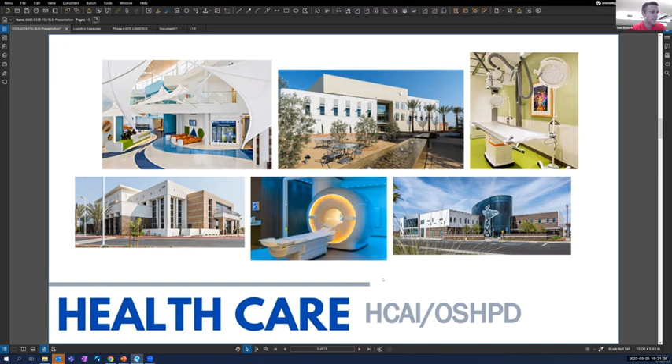That's really where a lot of our time is spent. I'd say the competing sector right now for us is senior living and multifamily/affordable housing. Senior living is where we've seen a lot of work in the past, and multifamily affordable housing is where we're seeing a lot of work right now. A recent graduate who just signed on - it seems like he's been here forever now - but Jaime just went from the Valley Children's Project and is now working on a pretty large multifamily affordable housing project.

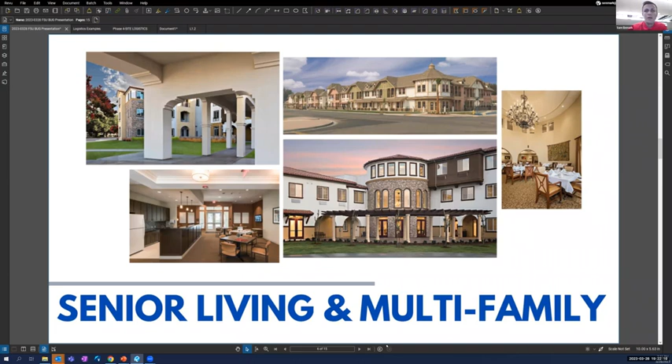Hey, Sam. I'm curious about the senior living type projects, because in Fresno there's not a lot of those. What's the outlook for expanding into that area more?

It's funny that you say there's not a lot of them, because Carrie, Garrett, you can maybe see more into it, but I feel like we get them all the time. Yeah, that's a lot of my backlog and my history of work is actually multifamily and senior living. I've done many of those. It was a pretty large growing market, quite a bit, within the last 10 years I'd say.

I just see that I know a lot of older people right now can't find housing in Fresno - they're called baby boomers, by the way. Yeah, they're all baby boomers. My parents, and you guys that are younger too, you're going to start seeing your parents looking for stuff like that. But maybe you guys are the only ones doing it, because I've actually helped my grandparents move into some facilities that I've built in the past. What I'm thinking is not so much assisted living, but like Del Webb's type stuff, where you can live in a 55 and older community. Oh yeah, yeah. So you guys have a lot coming up then?

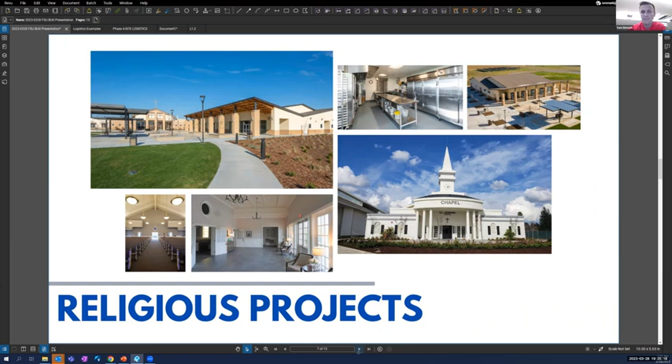And then specialty projects - I don't think we're ever going to dismiss something outright. So when someone comes to us with an RV park in Mid Pines and wants us to seriously look at it, we will.

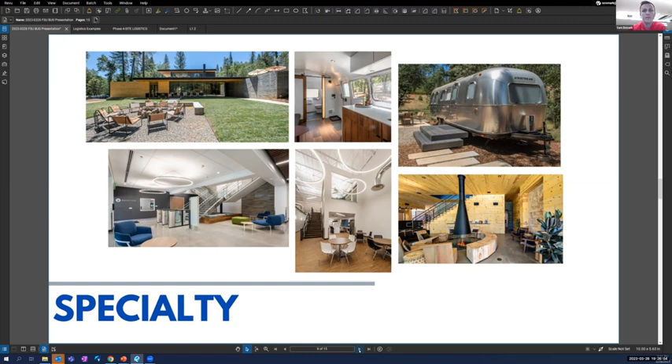So that is kind of a little bit about who we are and what we do. Anybody got any questions on that?

Okay, then we'll roll into careers at Quiring. So I would say, well, first off...

Internships - we're always hiring interns, looking for people to intern. I'm not sure on our exact availability right now, but if there's a spot, we're looking to fill it with interns over the summer. I know Jaime worked during the year as well for some of that time, so we're just kind of looking for opportunities for that.

As far as career paths go at Quiring, if you're going to go out into the field and be in a job trailer, you're likely going to go one of two routes: either a project engineer or a field engineer. The project engineer route will be more working underneath the project manager, handling some of the submittals, paperwork, the project financials - that's more of a focused role there.

And then field engineer, you're going to find yourself under the wing of an assistant superintendent or superintendent, and you're going to be more boots on the ground in the field, working on schedule, things like that.

With that, we'll keep going. We talked a little bit about what a site logistics plan is, but what should it cover? I'm going to roll through these fairly quickly, and we can talk about some of them in more depth later.

A traffic control plan covers how your crews are going to access the site. Pedestrian safety, if you're up against somewhere people will be walking past. Laydown, where all the material you're bringing in to complete the building will be put. Site security, often a fence, but sometimes site lighting, security guards, cameras, and similar things. You want to show where all of those are going to be.

Construction offices, for the general contractor and any trade partners with offices, where are those going? Cranes are critical, and should be part of every logistics plan — if you're going to have a crane on site, where is it sitting? Along with that, personnel lifts, if the building requires one.

SWPPP, depending on the job, is sometimes clearly called out in another drawing and isn't needed here, and sometimes you want to put it on the logistics plan just to make sure it's picked up. Emergency response plan, showing where people are going to evacuate to in case of an emergency.

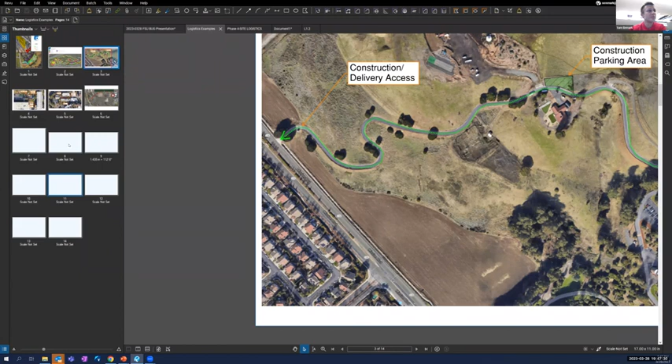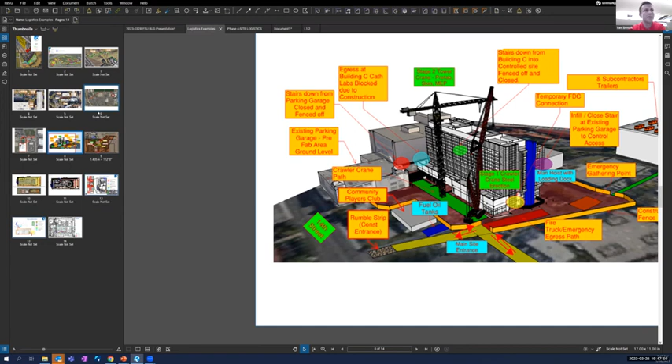Yeah, I'm going to just skip a step here and go to a couple of the logistics examples that I was planning on bringing up, because one of them does show - there we go. So anyway, logistics can be as in-depth as not in-depth. We're always trying to make them look pretty and presentable, but what I'd say is more important is making sure that you get the information you need onto a sheet of paper so that everybody can look at it.

So anyway, I say that only because what I'm going to show here, there's going to be different levels of logistics plans. So here is a hospital that was completed down in Southern California. This was not a Quiring project - I'll admit I'm pulling from a little bit of a past life here on some other jobs I've worked on and logistics plans. But it's a 7-story hospital, and there's a requirement - I haven't dealt with it in so long, I don't remember the exact requirement, but I think it's over 60 feet. Yeah, I'm getting some nods.

Over 60 feet, you need a personnel lift, or a man lift, in order to get your crews to the different floors during construction. Unfortunately, more often than not, the elevators are the last thing that goes into a building, or one of the last things. So having that ability to take not only your personnel, but also material up and down floors, is super important.

As far as location of it, I'm not sure if there's any OSHA requirements for location, but typically you're going to want to put that somewhere that's not going to be impactful to your construction schedule, so you're not going to have to do a lot of work right at the end of the job in order to close this area up. Basically you can see this blue line here - you're going to have that area open and incomplete until you get your elevators running, which again is towards the end of the job. And then at the very end, you're going to have to slap that thing together, close it all up, and get your man lift out of there.

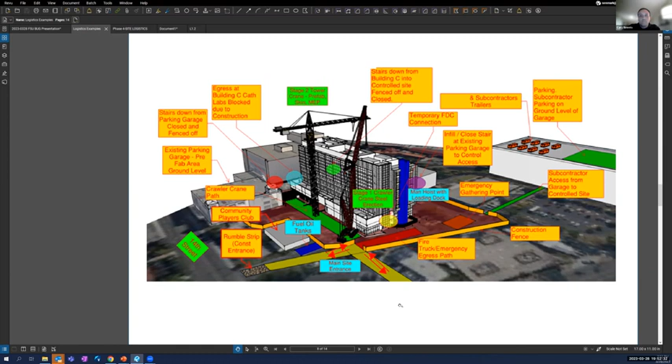I'm just curious, Carrie, Sam, on your jobs that are currently going now with all the weather problems you've had, have you had to do anything significantly different than you normally do? What's been going on with all the weather out there? Sarah, you want it? Well yeah, I was gonna say, since I'm still in a mud phase.

So we started out with, let's call it, one line of rumble strips, and we had large rock—in Bakersfield they like the rock to try and clean the tires before you drive out. Since then, we've changed to doing more rumble strips further into the project site, so more dirt falls off the tires.

We started out with silt fencing around the border of the project, and we've since switched to straw wattles because the wind rips the silt fence apart in this area. We also have a street sweeper that comes quite often, so we try to keep all of our job site vehicles on the street.

We're lucky in the sense that our job site is located out in the field, in the middle of nowhere right now, but we have a lot of street parking. So we have our trades offload all their stuff out on the street and not bring any vehicles on site. That minimizes all of our track out. So it really depends on your areas.

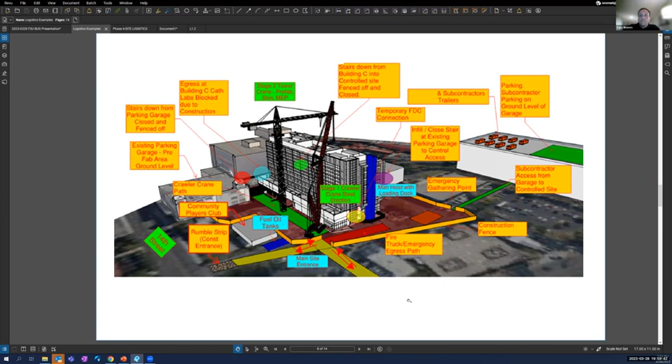Sorry to sidetrack you there, Sam. No, we'll get you back on track now. We live this every year, right? Like I tell my owners every meeting every week, during the winter, construction guys become meteorologists, and we're just so in tune with weather that it's all we have to talk about half the time. No, it's true. We've got one guy in our trailer, Ron, that's his job, he's the weatherman. Ron the wrench? Yeah, absolutely he is. I don't even look at my phone anymore, I just ask Ron.

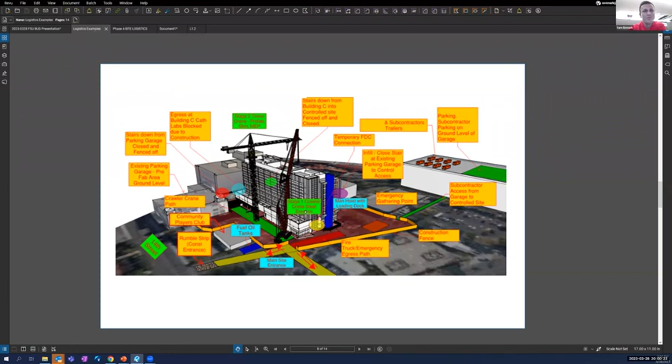Okay, so anyway, I just want to go through and show a couple of examples of logistics plans before we really dive into creating one and going through the Valley Children's example. So obviously this is a very high level, large project logistics plan. It's not going to call out everything you're doing within the building, but it does a good job of capturing the main things on the site, for instance, where the tower crane is going to be.

In this case, the steel was large enough that it required a crawler crane as well as a tower crane, so kind of the path of travel for the crawler crane, where contractors are parking, where our trailers are going to be, up on a parking garage across the way. It's little things like that it's important for the trade partners to know, and important for ownership to know, that hey, we're going to be taking up the whole 5th floor of your parking garage, are you okay with that? If the answer is yes, then okay. If the answer is no, then we got to find another solution.

So it's a good tool to kind of convey some big picture items. And again, this is a plan for, I think this was like a $350 million job, so big project, but they can swing the gamut to any level of project.

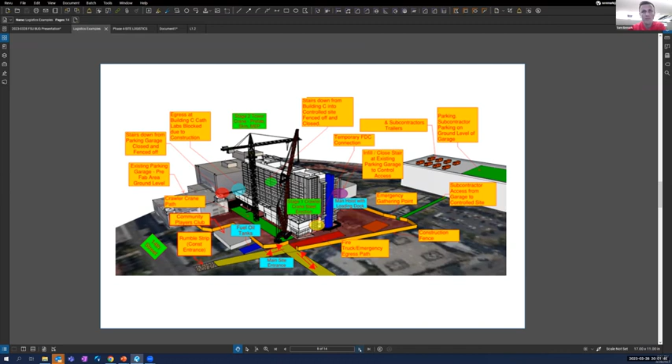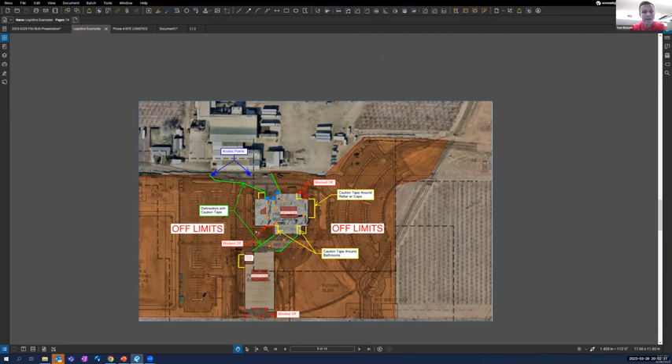So this one is a little bit different. It's not as important where restrooms are at, but logistically you want to show where people are going to be coming in, how this is delineated with caution tape, how they're going to be routed to the building, and then some other miscellaneous caution taped areas or items, and where they're storing the material during the cutting. So just a cool example of how you can have a big master plan and then something as small as that.

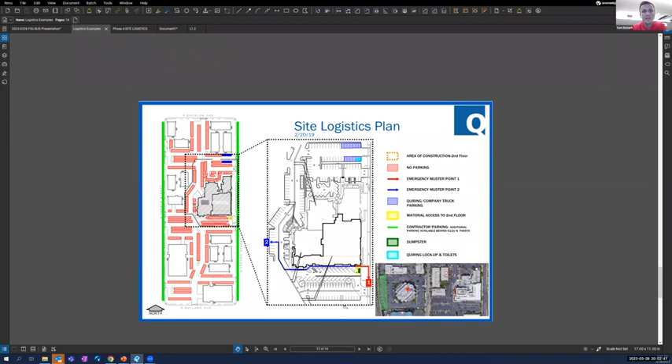I'm going to skip through a couple of these. There's a bunch of different examples, but this is getting a little bit closer to that healthcare one. So this is at a hospital here in Fresno.

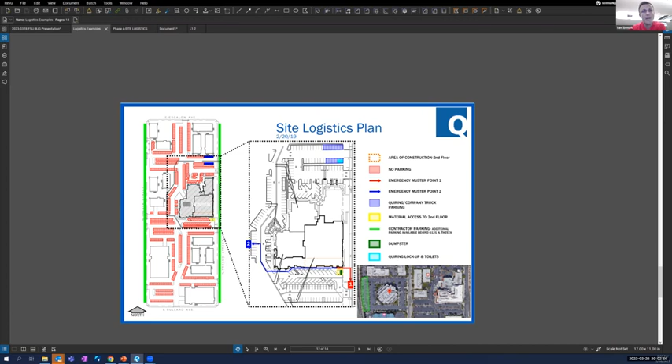So again, picking off some of the major items, where the trade's going to be parking, in this case it was along the streets. How are you accessing the job? In this case it was through a stairwell right here, with material access to the 2nd floor being through right here, and material access here, and then our dumpster out in the job site there.

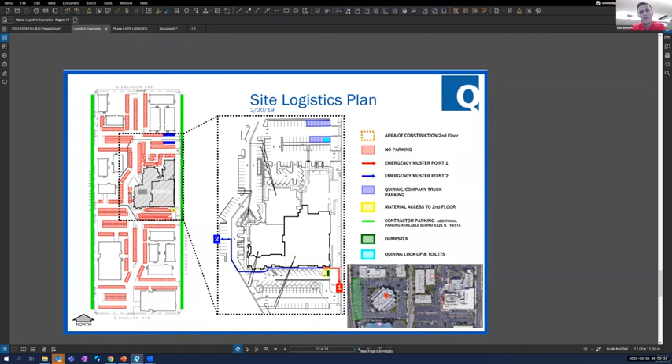So then the 1s and 2s are emergency muster points. So this is kind of big picture, and as you can see, it zooms in a little bit, and then you zoom in even more to get to the actual project.

And this one, again, inside of a hospital, so we will always set up some sort of containment wall, whether that's plastic or a pre-manufactured wall or a built wall, something to separate your construction from the hospital, because there's going to be a patient in this room right here. We need to make sure that we're not in any way impacting them with dust, with noise, with smell. That's actually a big thing you wouldn't usually think about, but smell in a hospital is something that gets everywhere.

Construction is not clean. You may not notice it when you're on the job site, but if you're expecting to be in a hospital and expecting everything to be clean, you don't want anything remotely looking like a job site or smelling like a job site getting into your area.

So we set up the containment wall, and then to help with the air, we will also set up a negative air machine. In this case, it was just one individual negative air machine feeding this area, but you could put multiple. The goal is to help contain everything that's within your job site in your job site.

So you're going to be pulling air so that there's nothing pushing out from your job site. If you have positive air pressure in a space, that means all of the air is pushing out into some of these areas. With negative air pressure, you're pulling everything into your job site, which is what you want. You'd much rather their stuff get into your job site than your job site get out into their clean environment.

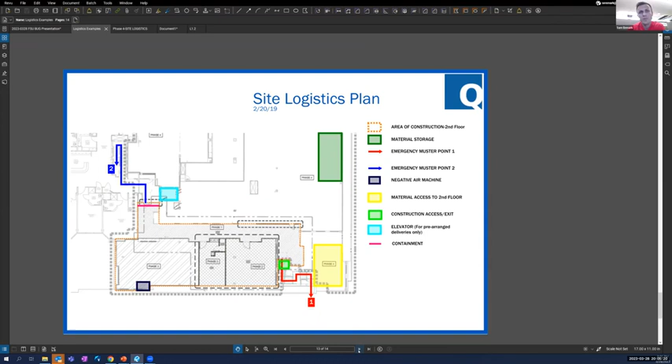So that's a smaller project logistics plan, and then this is the smallest logistics plan I could find. But we were coring 7 holes on this project, and had to show where those were and how we were containing it.

So we indicated each location of the core and then the containment. Putting it on a plan like this, a logistics plan, makes it really easy for ownership to pick this up. If I were to just tell you we had to drill 7 holes and we're going to be kind of over the PACU, which is the post anesthesia care unit, over that area...

They don't really get the picture. But if you send a logistics plan like this to them, they could say, okay, you're setting up containment, that's the blue line. Looking at the legend here, so I'm going to be out 1 chair PACU bed, 2 PACU beds, and then a clean utility storage and a dirty utility storage, right?

Then ownership can take a look at that and ask the questions themselves: can we live with that? Are we going to be okay serving our patient care without the use of these 3 beds and clean utility and storage and dirty utility? I'll tell you, in this case, the answer was actually no. It wasn't because of the beds, but because of the clean and dirty utility. They needed this in order to function, and they didn't have the required replacement within this facility.

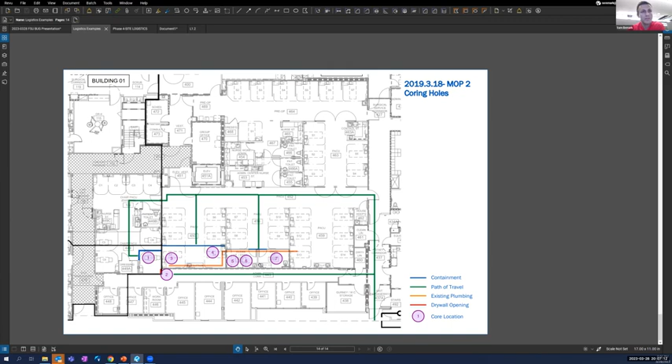So we actually had to come and do this off hours at night for these 3 so they could continue to use them. But without a logistics plan like this, it would have been a lot harder to have that communication that got to that answer.

So Sam, I'm actually glad that you're doing existing facilities type logistics plans versus just a new building out on an empty piece of land. I have some students, in fact one is doing a hospital in my 170 class, and maybe because we don't talk a lot of times when we do logistics plans in classes, it's kind of like new building logistics plans. So maybe you could talk about the special issues you have to deal with when putting a logistics plan together, and maybe Nathan can also pipe in and share what it's like from an owner's perspective when you're in an existing building, building a logistics plan, and how to coordinate and how important that is for an owner to be a part of that logistics plan. I don't know if that's clear or not, but...

Yeah, I'll start it off. I'm glad you brought up Nathan, because he was the first person I was going to go to, ownership. So obviously when you're looking at a logistics plan, it's funny how often we run into this with our trade partners, with our superintendents, with everybody.

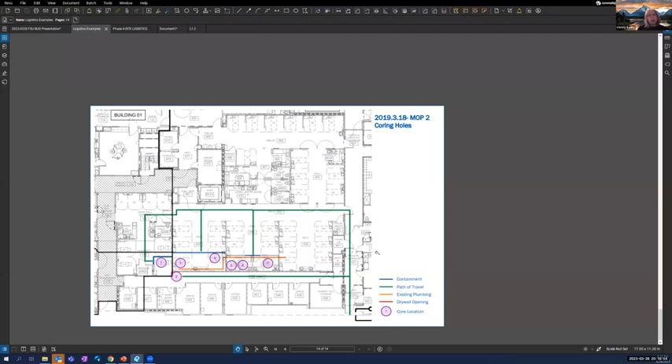And Sam, maybe you could talk a little bit about how do you coordinate - you're coordinating with the owner, but you also have to coordinate with your subcontractors. Do you usually bring your subcontractors into those meetings with the owner, or is it more of a pass-through situation with the communication?

I'd say most of the times, honestly, unless it's large scale coordination that's going to require input - I'm thinking specifically MEP, a lot of times they're very specialized trades - unless it's really going to require their input, a lot of the times we try to coordinate with the owner and have that be us as the conduit between our trade partners and ownership, in both directions. Our logistics plan doesn't just get built by Quiring - it's all of our trade partners that have input, that we reach out to if we're not sure on something, and then we try to compile that plan and make that presentation to Children's.

But if there's a large project - I know in the past I've done electrical shutdowns in hospitals - those logistics plans, typically you've got your electrician and your electrical engineer right there with you talking to ownership. So for specialty ones like that, you'll want to make sure that they're involved. But other than that, you try your best to be that conduit between the two.

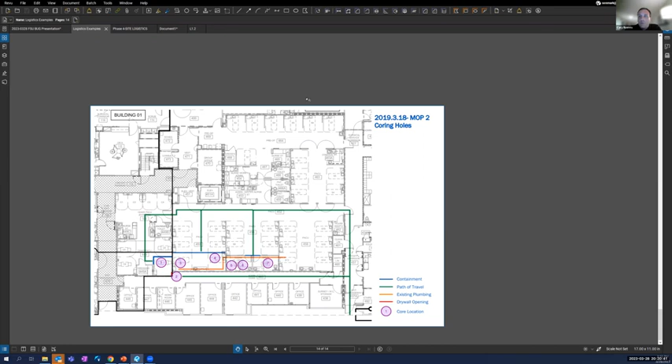Yeah, coordination of that magnitude requires a lot of facilities input to make sure all the emergency service systems are on board. A lot of these jobs - it's not necessarily clear on this drawing Sam's got up here - but there are boundaries that we're bound by in some of these remodel projects. We're not allowed to go beyond certain areas, so our scope of work is very detailed, and OSHPD makes sure that we stay within those areas.

Yep. I've actually done work in the hospital at Valley Children's, when we were doing an oncology remodel, and there are things you don't realize impact other wings of the hospital until you get that phone call saying you have to stop. We were doing some anchor drilling for steel for a new pathway to the roof, and they happened to have surgery going on - not next to us, but in another wing - and they could feel a little bit of vibration. So we shut down. Your logistics can constantly change based on the needs out there.

And you can certainly tell by just some of these conversations, especially for the students listening, that there's a reason why Quiring values their client reputation and their relationship with their clients - because this kind of coordination is very important with an owner in making sure it's done right. So if you see that they have a high percentage of repeat clientele, it's because they're able to work in that relationship and coordinate not only the technology, but also the people.

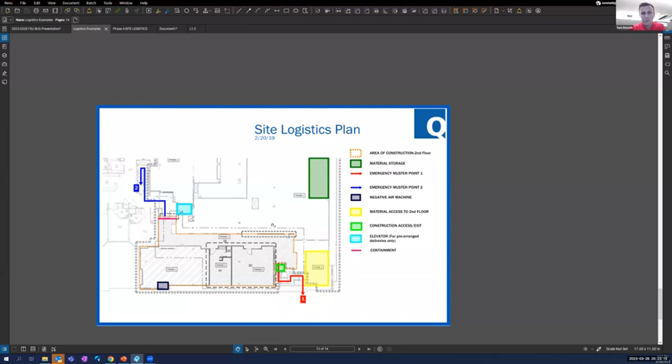All right, well Christy, I'm going to get into a little bit of the phase - we're calling it phase 4 logistics - and this is just more around the hospital, and maybe dive a little into some of the Bluebeam stuff if we're ready for that.

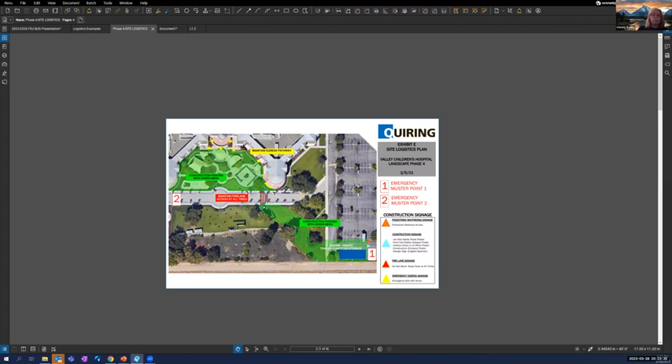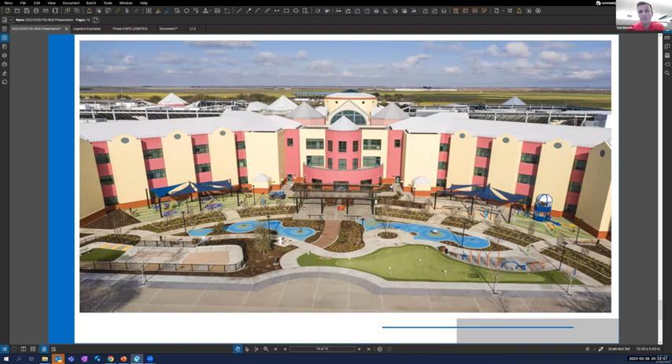I think a lot of it will still be hospital coordination, so keep those questions coming. So this one here, let me take a step back and go to the picture of how this one ended up. So this is Valley Children's - we're calling it Landscape Phase 4 - but it essentially is the playground, or the main playground in the back of the hospital.

So it's a really cool space. It was a nice outdoor space before, but I think this is the finished product, and it's an awesome space for not only the patients in the building, but also their friends and siblings who have been in the hospital with them every step of the way to get some outdoor time. There's a water fountain over here.

There's a play structure, swings on this side, mini golf. These are all really cool instruments. If you're ever in the back of Valley Children's Hospital, go mess with some of these. They're pretty cool. There's one here in the ground where you step on it and it makes a bunch of noises. It's a really cool space for the patients and the people there to support them to have an outdoor space.

But that being said, it is pressed right up against their hospital. So you've got a physical therapy room right here that exits right out to here. You've got patients in all of these rooms here, kind of looking down on the job. We're right outside their windows.

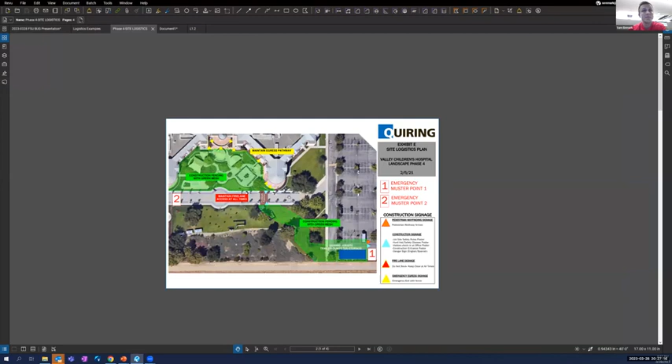So our game plan for that - and I'll switch to the logistics here, this is the final state logistics - is we would have all of this work in here completed, and then they would be able to exit out this way to here. So all four of these doors are open.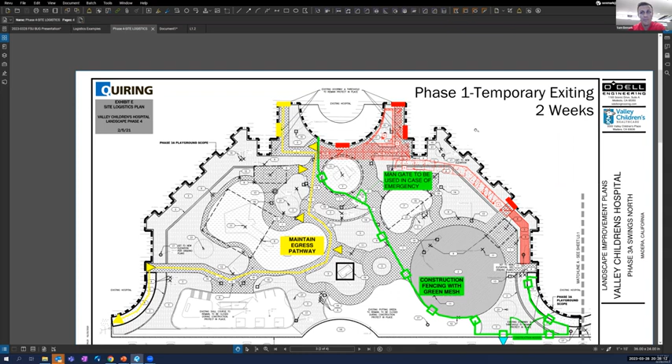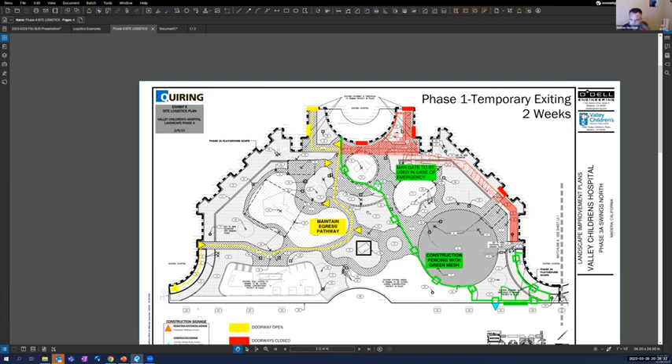And this is another thing with these logistics plans - typically when you're phasing them like this, what's going to be important to Nathan and his team and ownership is duration. How long is this work going to take? How long are we going to be in this setup so that they can convey that to their stakeholders as well as HCI and team. So this was the first step. And then the second phase was this area was all completed.

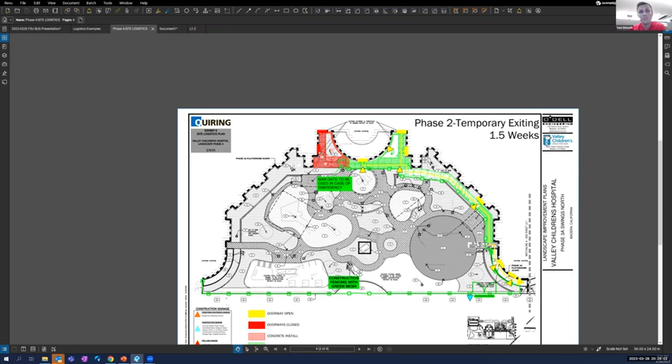And we just needed to complete this area. So at this time, we took the whole project over, but really just focused on finishing out this area so that they could get back to their normal egress plan. This one was shorter, so it was a week and a half, and then the last one was back to normal. Everything is complete and everybody's exiting out that way, and we're back to our initial phasing plan, which was this one right here.

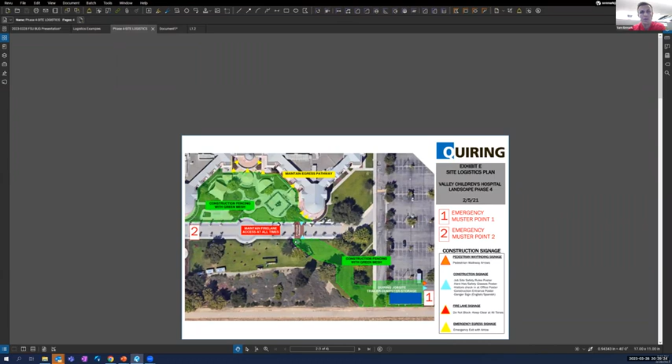So any questions on kind of phasing? I'm going to get into a little bit of Bluebeam and how we go about building some of these, and some of the things that I did on that one that kind of help convey logistically what's going on.

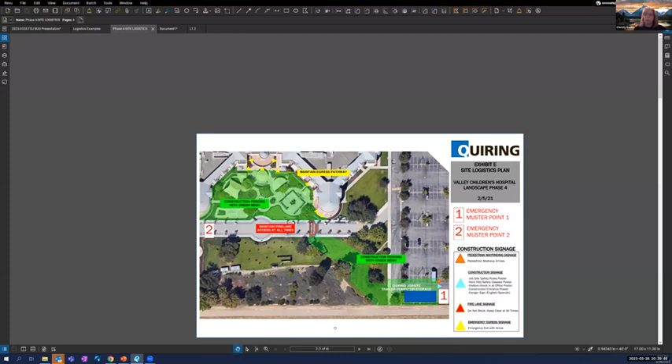Matt had a question here. He asked, what was the name of the plan that shows a door will be temporarily closed? And I don't know, Nathan, is that the answer there? ILSM, or interim life safety measures plan?

Yeah, that's correct. And at some point, OSHPD or HCI changed it to construction safety plan, but Joint Commission still calls it an ILSM, so that's what we typically call it. Fun part of having to deal with a lot of different government agencies and other things, but basically it's an ILSM.

Yep, and every agency has its own acronym too, so you get to learn them pretty fast. Exactly, I think every kind of construction project has their own acronyms. No, I'm with you. And everybody has their own different ones sometimes too. It really throws you off.

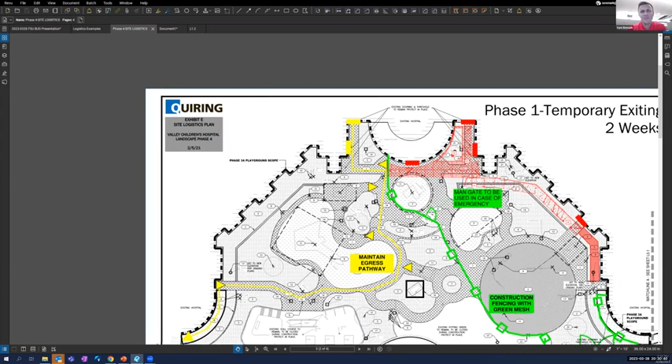But yeah, that plan is basically, they take this plan, Matt, and kind of add to it, and it's really to get the buy-off from the fire life safety officer that this plan is okay and patients are still going to be safe during this. That's basically the gist of what they're trying to get to.

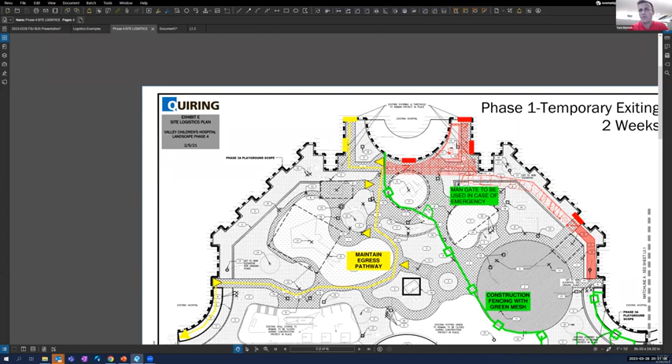Cool, thanks guys. And on top of that, a few of those situations come up. It also goes to the fire marshal for Madera County. You really need both to sign off on the site logistics plan, or the ILSM. Oh, that's interesting.

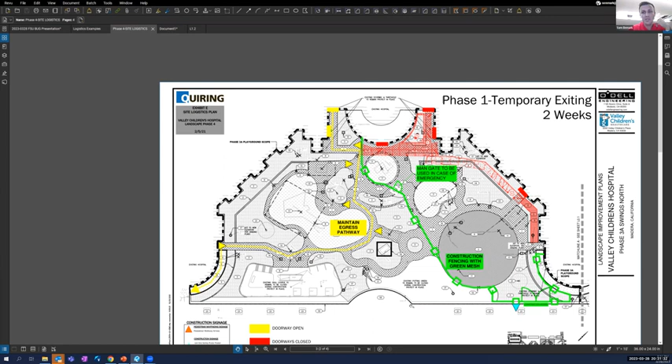Yeah, so that's again just one of the beauties of HCAI work, is that you've got HCAI, which is basically managing the inspection and building of the hospital. And then you've also still got the County of Madera that has to be responsible for these, because the County of Madera is the one that's going to be rolling trucks if there's a fire. The County of Madera is going to be the one kind of responding to emergencies, and HCAI's role is just to make sure that patients are safe during the construction.

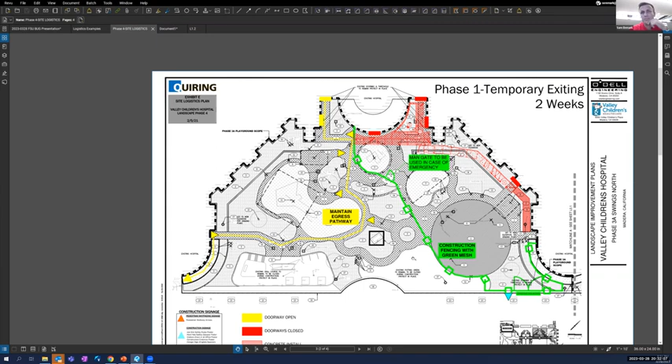So let's get into kind of some of the fun stuff. Logistics-wise, always try to look for a plan that covers the whole project, or as much of the project as you want to focus on. So for this one, I took a plan from the drawings and cut out all of the other information. So all of these keynotes were called out down here.

Don't really need those, so you just use the cut content tool to cut all of that out. In this scenario, it's already all been done. But that's kind of what you do to clean this up so that you're not having a logistics plan that has too much information on it, because you really don't care about all the rest of the stuff. You just want the new stuff, or the logistics that you're going to be focusing on.

So coming into here, the first thing that I'm going to do is draw the fence that I wanted. On a logistics plan, you could just use your markup tools up here to draw a fence, and it would convey all the information that you need to convey. I'm just going to kind of quickly draw it. You can change the settings on all of it so that it's not just a black line over a black line, but maybe a green line.

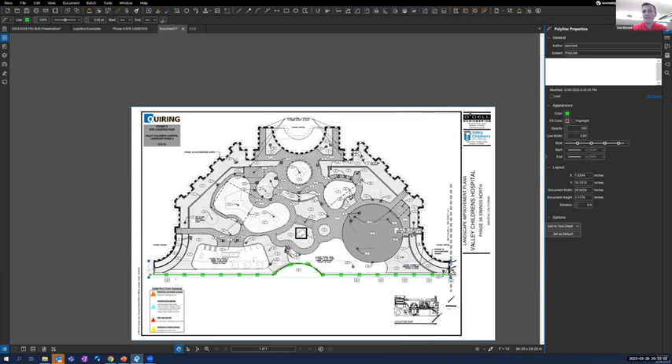We'll make the width greater, and then go through kind of just some of the... oh, Ray, you are speaking my language, man. Sorry, I got distracted.

You've got the fence line here, and you could just use the normal markup tool, and it does all the information and conveys everything you need to.

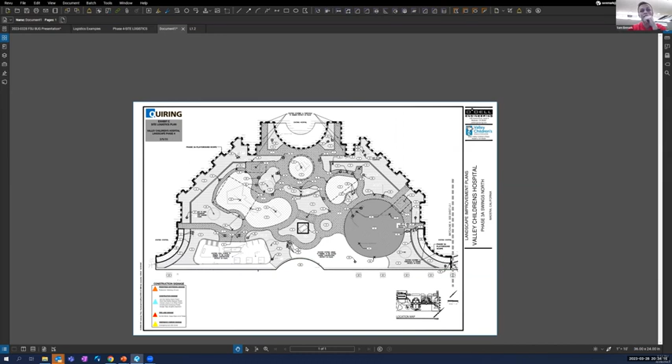But what I find is usually more useful is if you can use a scaled markup, you get some more data into this logistics plan that could be useful somewhere down the road. I'm not saying it's immediately going to be useful, but for fence line, if you're a project engineer or field engineer putting together your logistics plan, and your superintendent comes over and says, hey, I got to order fence, how much fence do I got? It'd be way more useful if you could just click on this line and figure out how long it is rather than doing a new takeoff every time they ask for something.

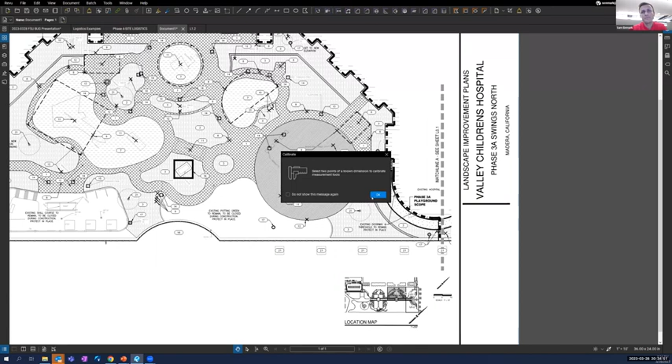So in this case, I'm going to scale the drawing. Hopefully, being part of the Bluebeam user group, you guys are all somewhat versed on Bluebeam, so I'm going to go through these pretty quickly. Stop me if you've got any questions, but scaling the drawing, I want a custom scale, 1 inch equals 10 foot.

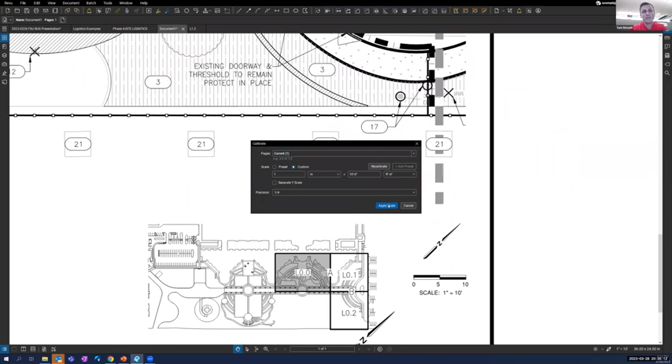And then I'm going to go through and draw my fence. I'm not going to draw it the same way that my logistics plan had it, but it's a useful tool to use. Instead of just having a green line, now I've actually got 290 feet of fence, and you can pass that information along to either your superintendent or to Garrett in estimating and say, hey, make sure we're including 290 feet of fence through the duration of construction.

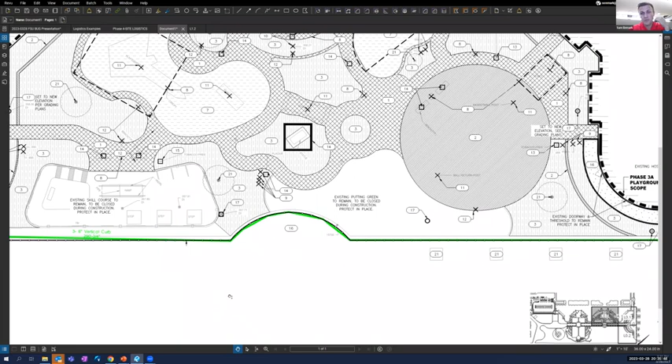So that's one kind of useful tip or trick when building out these logistics plans.

The other one that I like to use, and you could kind of see it on the site logistics, I'll actually do a little bit cleaner version of it. I'm doing this logistics plan here over a demo drawing, and I want to start to put in some of the new work that we're doing. Rather than just doing like a square, I kind of want to make it look a little bit more professional and just a little bit cleaner than that.

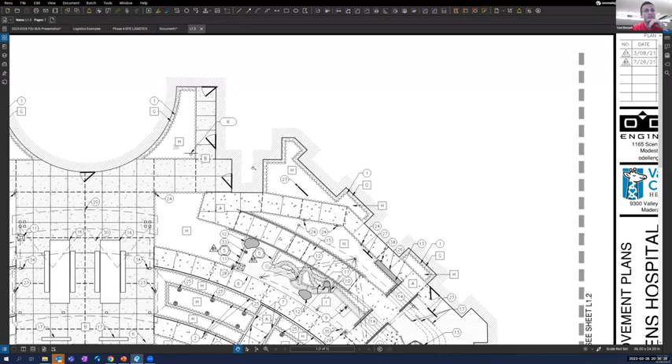So what I'm going to do is go to the new drawing where we've got some of that stuff. I'm going to take a snapshot, just using the shortcut G to take a snapshot, and I'm going to actually cut the section that we're going to be completing.

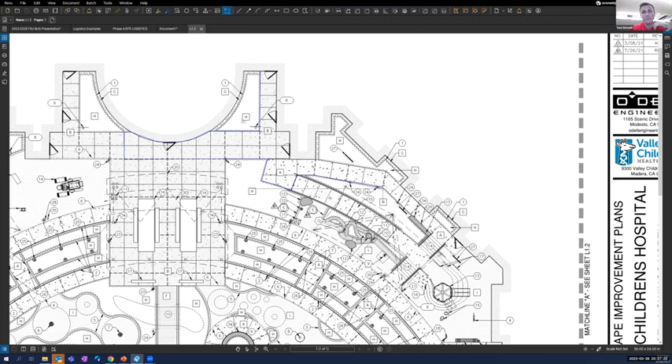I'll just kind of go roughly here. If you were actually doing this, I would recommend taking the time to be precise in what you're doing, because a lot of times the precision can make all the difference when you're talking with owners. You may think something's obvious and clear, but when they're just looking at the lines you drew and the line is drawn somewhere slightly different than it should be, it can cause a question, and that's just more conversations and communications that has to happen down the road. So I say be precise, but I'm going to go quick here and not be as precise.

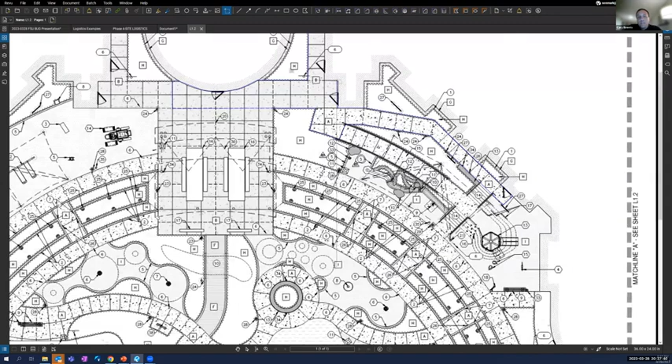I'll also chime in on that, being precise when you're probably doing this snapshot overlay. That's what I think Sam's going to do. It'll also tell you if you have a bust in some of your scale and dimensions too, potentially. So when you line up your corners and you see that things don't overlay correctly, you could find yourself talking to your architect to figure out where their bust is. Agreed, Gary.

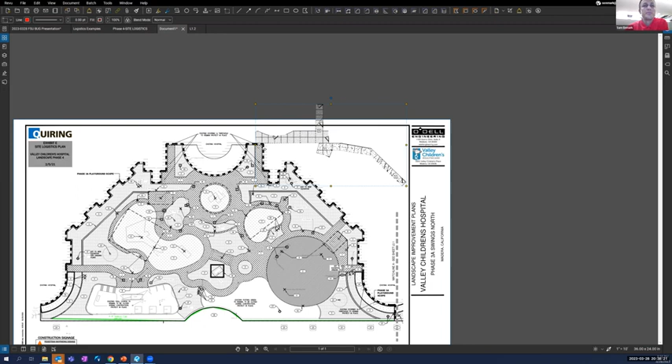So anyway, I'll take this and I'll just kind of throw it on there. And then you're going to see that it's going to very quickly get hidden. I say very quickly, sometimes these things, as you're moving them, take a little bit, so give it a second. All right, so it's sitting there now, and it's really difficult to see.

So another tool that I use quite often is the change color. If you right click on whatever you just snapshotted and go to change color, you can modify the color. So I'm going to change the source color from black to red. You can go through and it's picking out all the different colors within that, and you can change all of them to your red or whatever color you want. In this case, I'm just going to use red pretty much across the board.

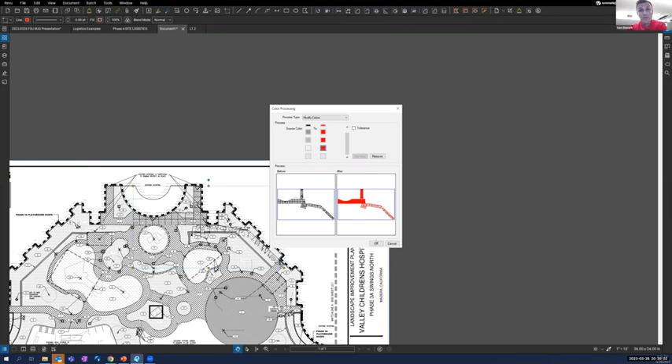So now you've got the actual footprint of what you wanted put into your logistics plan. Then, just to clean it up a little bit further, you can cut the content underneath it. You don't need to do anything with the actual markup you just put there, as long as it isn't flattened. You can just cut out, and this will cut what's underneath it.

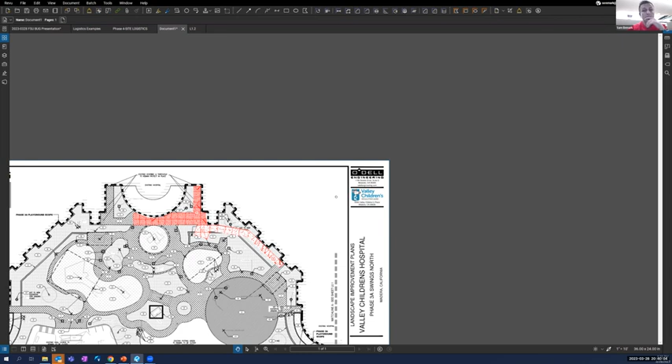There we go, now it's a kind of clean cut and has information and data on there for the logistics plan. I find I use that quite often when putting together a logistics plan, because more often than not, you're getting from some sort of demo, especially within the hospital, to a new state, and you've got both of those drawings, so you might as well use them and overlay the sections that you need on top of each other.

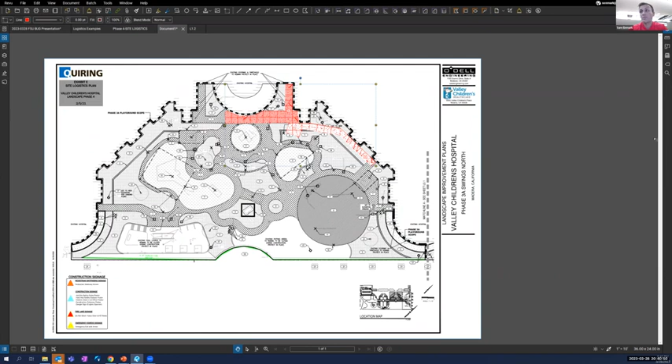So legend creation - you can create your own legend and label everything as you want, or make sure everything is properly labeled. You can click on the item you want, and instead of the subject being 'snapshot,' you could have 'install concrete.' So that's the subject for that. And this one here, the fence, is not going to be a 6-inch vertical curb, it's going to be fence, and I'm just going to change the label to fence.

Select everything - ideally in a full logistics plan this would be more than just 2 items, but you can do both - then use the legends tool down here and create new legend, and select where you want that. Now you've got a legend. If you want to change what's shown here, because I don't care about the quantity or unit, you can do that in settings by going to edit columns and taking off the unit and quantity, just keeping the description. Now you've got a pretty easy to build legend for your site logistics plan.

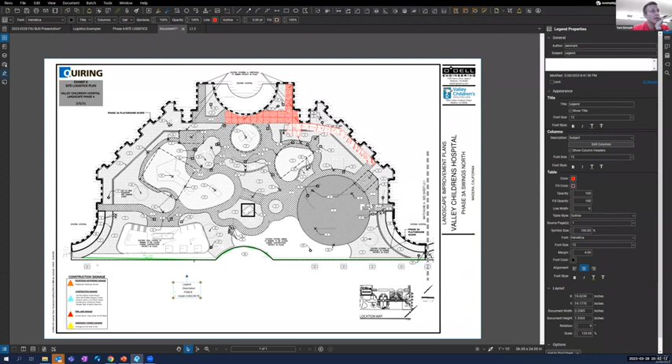The last one - if you guys haven't gotten into tool chests, I'd recommend taking some time to mess around with these, as well as adding some from the Bluebeam website. For the first one, I'll go door symbols. You could spend forever building a door, or just download the double door symbol from Bluebeam and throw that in there, and now you've got yourself a nice gate in your fence. You can change colors on it too, so it's not black but green - now it just looks like part of your fence.

And then I think I've still got it open - let me see here. With the tool chest, there's a lot of different toolboxes you can download from Bluebeam's website. There's architectural, electrical, mechanical, punch list, all kinds of different ones.

So the last one, and I think a lot of people possibly know about this, but maybe not everybody - the draw to scale tools up here, your orange tools in the corner. This is really a useful tool. As much as you can get to scale on these drawings, the better. I've already scaled the drawing, so the sheet recognizes the scale, so I can just click on any of these tools.

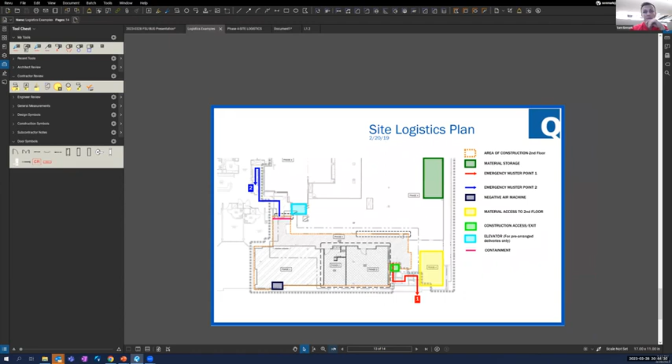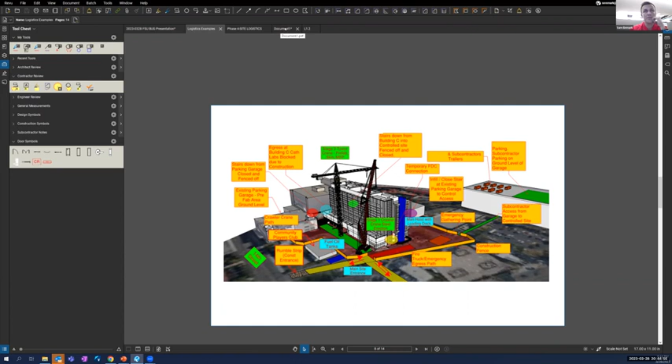When you're drawing, on all of these logistics plans you've seen, some of the ones we were initially clicking through - it's great to have your rumble strip shown, but how big is your rumble strip actually? Try to put as much detail as you can into your logistics, sizing-wise, to show what it's actually going to be. Because the boxes are good and a good information relay, but if you can actually get it sized right, you're just going to be better off.

And it's going to look right. Just make sure your page scale is correct. That's the biggest thing when you set it. Some designers tend to have different snapshots or different things on their pages that might be at different scales, so just be mindful of that. I have run across that in the past.

I would recommend, even if you do set your scale off of the scale bar on the right side, find something on the drawings that you know the size of. A lot of times I use a door, because most doors are either 3 foot or 4 foot, and I'll scale a door to make sure the scale on the sheet is right. Or if you've got an actual dimension on the drawing, use that instead. It never hurts to double check. I do it every time I set a scale just to make sure.

Sam, I had a curiosity - I've always called it OSHPD, but maybe you could explain why we're switching from OSHPD to, I can't remember what Nathan called it, ACAI, HCAI - it's called HCAI. Yeah, so maybe why'd they make that switch? And then when you're doing the logistics plan, is there anything specifically related to these kinds of projects that you have to have on the logistics plan?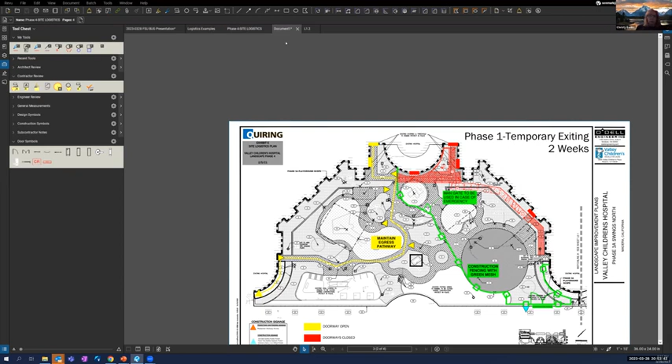I just asked because we don't get a lot of that in the Central Valley, but you go into Silicon Valley and there's a lot of biopharmaceutical and clean room projects. I've heard they're somewhat similar. Yeah, no, but I bet there's some completely different aspects too. Sorry, go ahead, Sam.

I'm completely with Clint. The challenge of working with HCAI is you need a drawing for every single little thing you do, and getting the drawing isn't always the challenge—it's getting HCAI to buy off on the drawing before you do the work. In a typical construction job, you hit a structural issue in the field, write an RFI, your architect and structural engineer address it, and you can proceed. In an HCAI building, if it's deemed materially altering—a fun phrase you'll spend a long time arguing over—you have to get OSHPD to sign off on your drawing before you can build anything. Sometimes that takes weeks, if not longer, so your schedule may suddenly depend on that one RFI taking weeks to get approved by OSHPD, HCAI.

So do your submittals and procurement have to be approved by HCAI or OSHPD as well on these types of projects? Specific items do, not all.